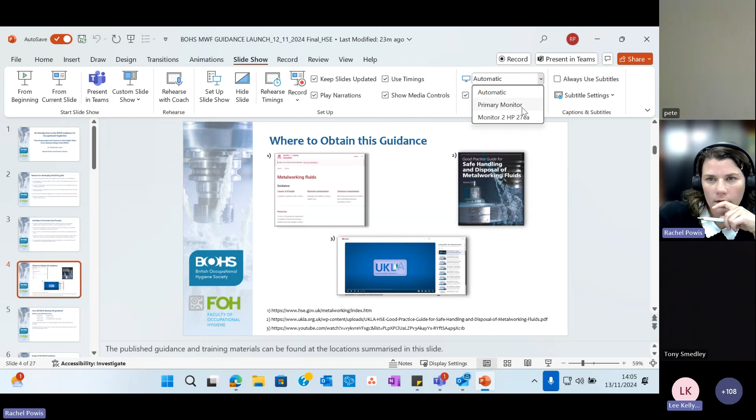Rachel, I'm so sorry. I think we're seeing the wrong screen. I think we're seeing your desktop. Oh, right. Okay. It might be another window to click on. Bear with me. Oh, there we go. Full screen. Is that working? Oh, you know what? It still goes to the other one. How very strange. Can it be dragged over or something? No, that's what I'm trying to do. Lee, help. So if you go to slideshow on the top bar, and then monitors on the right hand side, automatic, and then maybe select if you're using a multi-monitor setup there. And then try going from beginning. Is that looking any better? Yeah, okay, perfect. I'll skip back to the beginning. Sorry about that. This is a problem with having to come into the office because my Wi-Fi at home's not working. So there's been a few last minute changes to the schedule.

Right, so picking back up from where we were, a lot of the reasons for the health effects that we're seeing are due to contamination of predominantly water mixed metalworking fluids. So this could be metal contamination, chemical contamination, or biological hazards, all of which increase the risk to health. Exposure is predominantly through inhalation, through breathing in the mist, fumes and vapours from machining, and all of these increase the respiratory health risks.

One thing that has been identified is that many UK companies don't understand these health risks, and they're not doing enough to act to reduce the exposures to metalworking fluids.

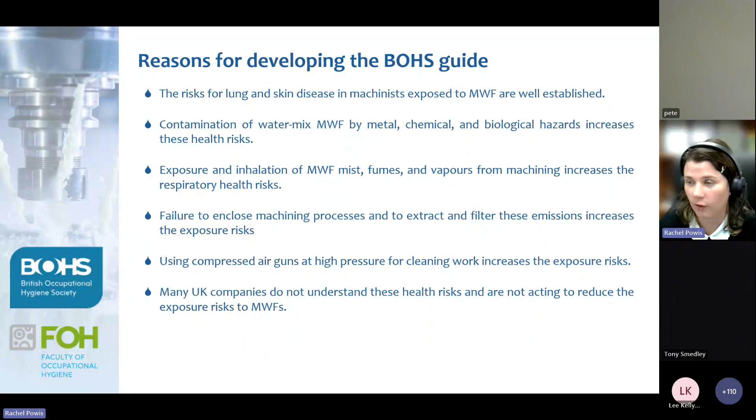As such, there's been a lot of activities recently to promote good practices around control and reducing these exposures to metalworking fluids within the workplace environment. So BOHS has already organised several regional meetings, and there's been conference sessions all aimed at occupational hygienists and focusing on these control measures to reduce their health risk.

Concurrently, HSE has worked with BOHS to develop good practice guides for occupational hygienists, but also information directly for duty holders for working safely with metalworking fluids. This is something that's been reflected by the UKLA stewardship group. In tandem with HSE, they've developed a good practice guide on managing the quality of metalworking fluids, and that was reviewed by BOHS members. There's also a lot of published guidance on YouTube, with training videos predominantly aimed at duty

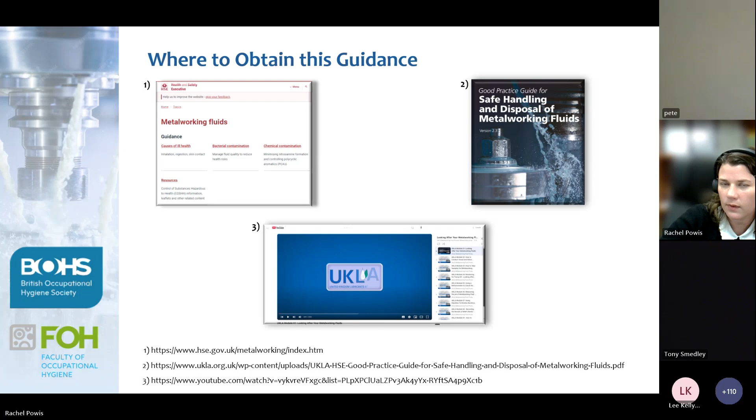holders. However, there was a gap for guidance for hygienists on how to assess these risks. All this other guidance is available online. I'll leave this slide up for a few seconds so you can get an idea of where you can find these. But as I say, there was an identified need for specific advice for occupational hygienists to visit machine workshops and undertake these surveys for exposure to metalworking fluid.

As Mary's already introduced, BOHS developed this guide through a metalworking fluid expert group. It's already been introduced to you, thank you. The panel included occupational hygienists and occupational health risk specialists. The guidance in its form now is available online, and it's been reviewed by HSE and both BOHS internal experts and external experts.

So the scope of the guidance is to focus on risk to health from metalworking fluid and how to manage that. The sections are on managing the quality of metalworking fluid, as well as assessing employee exposure to metalworking fluid and general good controls to reduce the exposure. One of the main takeaways from this guidance is an audit tool aimed at hygienists to be able to use in the field to assess the adequacy of controls. And we're going to talk about that a little bit later on towards the end of the presentation using a specific case study so you can see how it can be put into action.

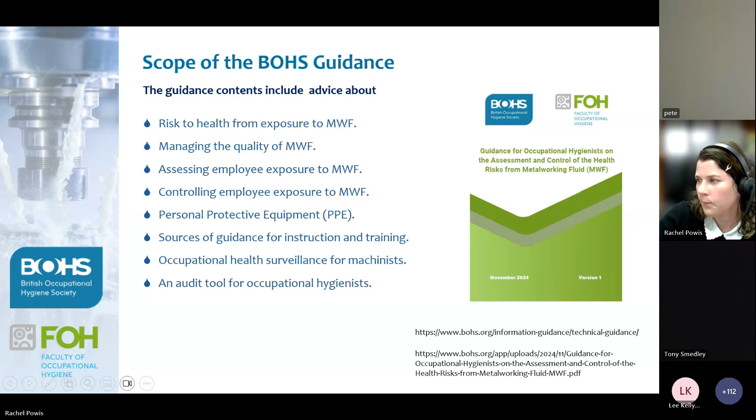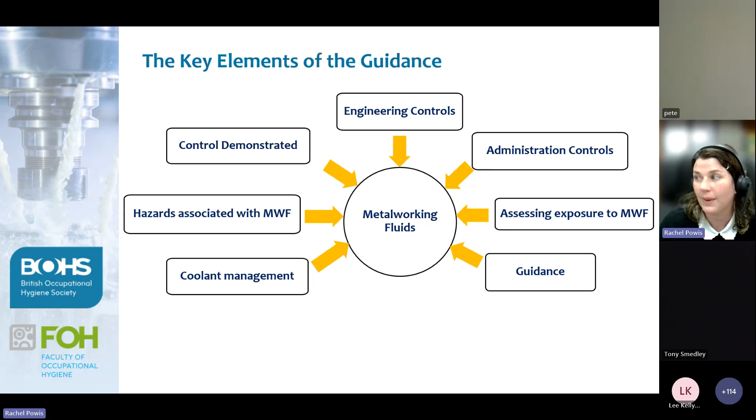So the key elements of the guide, just illustrated in this figure here, focus on the maintenance and use of control measures. However, to provide a little bit of context for people who are using this guidance and using the audit tool, I just need to talk about some other sections that summarise the hazards associated with metalworking fluid and some key principles for managing metalworking fluid quality.

So the main health risks from exposure to metalworking fluid are respiratory disease and skin disease. So these conditions are caused by contact and exposure, mainly due to inhalation. This can be from the metalworking fluid mist, fumes and vapours, respectively. The most serious respiratory diseases are allergic, and they include occupational asthma and occupational hypersensitivity pneumonitis.

This is especially evident in older water miscible metalworking fluids, where as fluids age, they can become contaminated with fungal or bacterial allergens or chemicals, and it's especially evident in poorly managed metalworking fluids. That's not to say that new and clean fluids are not a cause of respiratory disease. It's just that the risk greatly increases, particularly in older fluids which have become contaminated. No single hazard has been identified as a cause for these respiratory allergies, but it's likely that it's due to the bacterial and fungi or yeast growth in the fluids.

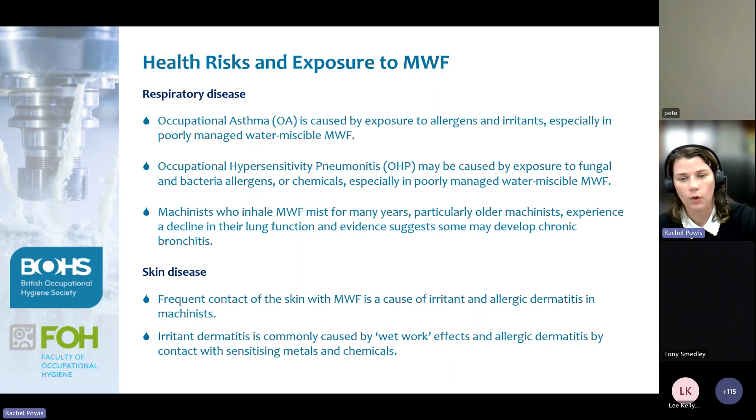As well as this, contact exposure can commonly cause skin disease. This can be irritant or allergic from contact with things in the fluid, but it could also be from wet work, especially where operatives are soaking their hands in fluid for quite a long time. Again, some individuals are susceptible to this because of the sensitizing metal and chemical elements within the fluids.

So this is all to say that exposure to the hazards in metalworking fluids is a complex circumstance. Hazards vary, and that means that we're looking at a changeable exposure circumstance. Tramp oils, metals, biocides and microorganisms can accumulate in the metalworking fluid, which greatly increases or changes the health risk as the process goes on.

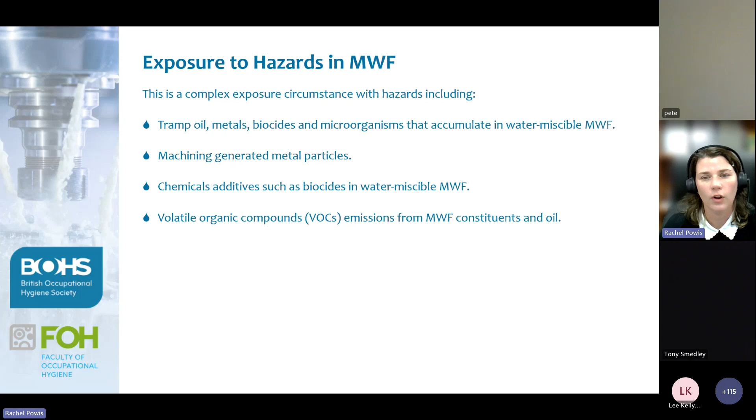There's also other considerations to take into account, and that's the way that fluids and droplets and aerosols are getting into the environment. So this can be from high-speed machining or cleaning down, which generates quite a lot of aerosol, but it can also be from volatiles or VOC emissions associated with the fluids and the oil.

So with this in mind, and given the exposure and health risk, it's essential that employees exposed to metalworking fluids are within an occupational health surveillance programme. So early detection of these is important. Typically, health surveillance is undertaken once a year, and it may include lung function measurements or dermal checks for people

with relevant symptoms. This guide is not to go over occupational health surveillance, but it does point to general areas and guidance and the sort of health surveillance that's important and should be in place. So if you need any additional guidance to this, I'd signpost you to the COSHH Essentials, which focuses on occupational asthma and health surveillance for occupational dermatitis.

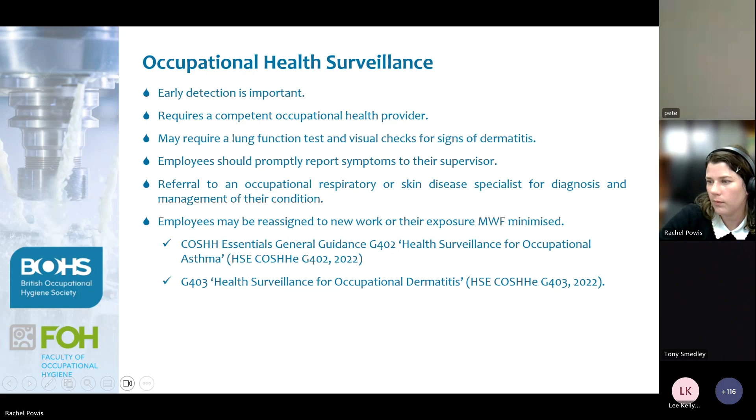What the guidance is aiming to do, however, is provide a framework for managing health risk and exposure. To give a bit of context on how this is discussed within the guidance, I'm just going to walk you through some control measures, just following the hierarchy of control.

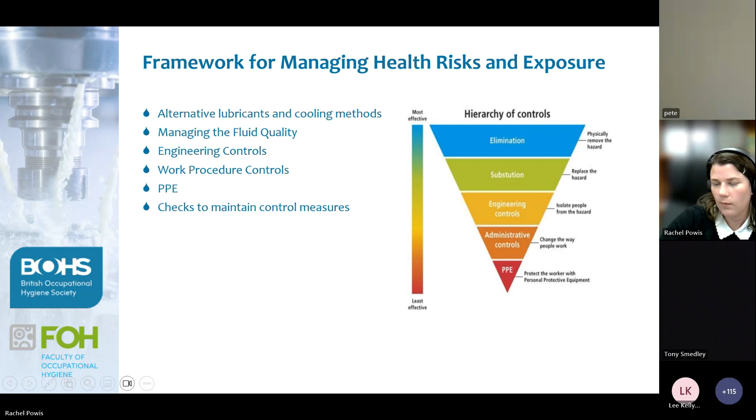So first off, there's been a lot of developments in the lubrication and cooling methods, which means that there are other options rather than normal fluids that are making their way into workshops and into the environment now. So one of the options for reducing exposure is to replace normal water-based metalworking fluids with an alternative.

So within the last decade, there's been quite a lot of advancements in this, and this has been predominantly pushed through really for environmental sustainability reasons. But some of these new technologies could have the addition of being able to improve employee safety.

So, for example, semi-synthetic and synthetic metalworking fluids, in which the mineral oil content's been rapidly reduced, could be a safer option because there is some evidence to suggest that bacteria can't readily grow in these environments. Additionally, plant-based oils are becoming quite popular, and they could offer some potential benefits from a workplace exposure point of view, mainly due to the fact that these aren't volatilized quite so easily. So potentially there's less VOC emissions.

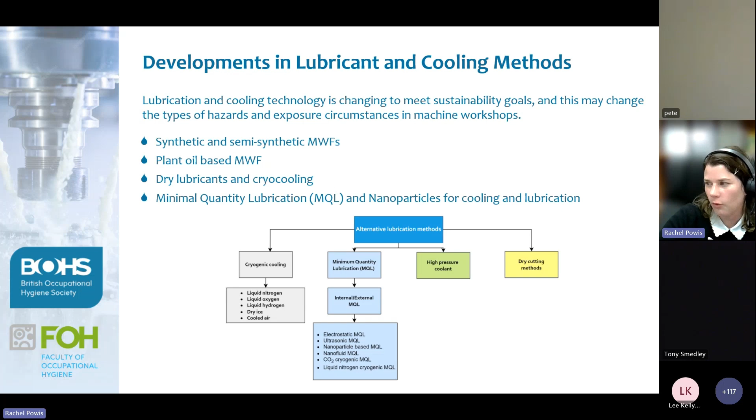So moving on from here, with that little bit of background, we're now going to take a look more in depth with the guidance and what it is focusing on. So the main takeaway from the guidance is the BOHS audit tool and how controls are being applied effectively to reduce employee exposure. So with that in mind, I just want to give a quick rundown of control options that are available. So the guidance outlines practical control options, again, consistent with the hierarchy of control.

It's not intended as an LEV design guide. Information from that kind of perspective is already widely available. So there's information from both the HSE and ACGIH, amongst others, focusing on effective LEV design. The guidance does, however, talk about how these can be applied for control, and as an occupational hygienist, how we need to be aware of exposure scenarios that they're aiming to control or risks within the workplace.

So due to the nature of machining and the wide range of machine types, everything that we've come across within a normal workshop, it's unlikely that engineering controls are going to be a one size fits all. That being said, it's generally practicable and affordable to fit LEV on most CNCs, particularly where they're already enclosed. The guidance does talk about specific considerations for open plan or large gantry machines, but in the main, extraction is essentially going to be the best option for minimising exposure whilst minimising impacts on production rates.

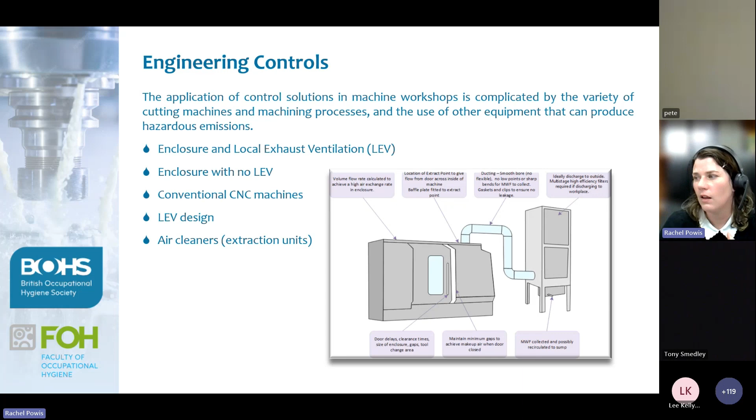In tandem, work practices and procedures to reduce both inhalation and skin exposure to metalworking fluids can be effectively applied alongside these engineering controls. So a common consideration is with the use of compressed air, which is often used to clean components or tooling heads and is generally preferred because of the quality of finish that it can give. However, the use of compressed air line does generate large amounts of metalworking fluid mist and droplets within the air.

So in addition to the inhalation risk that this can obviously cause, it can contaminate clothing and the skin, and the force of compressed air can also drive contaminants into the skin, which exacerbates any skin disease risks from this. So there's several practical and commercially available alternatives to compressed air lines, and they're outlined within the guidance and just on this table on the screen.

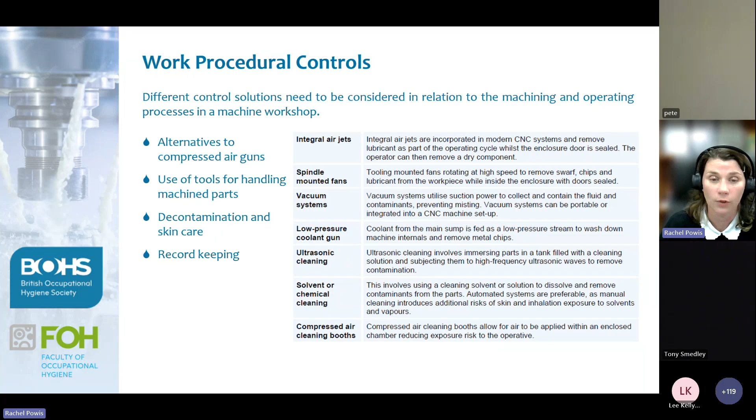So the guidance pinpoints to these and discusses risk mitigation measures, as well as discussing overall control strategy and the need to consider decontamination, skincare and suitable maintenance and management records for an overall control of metalworking fluids.

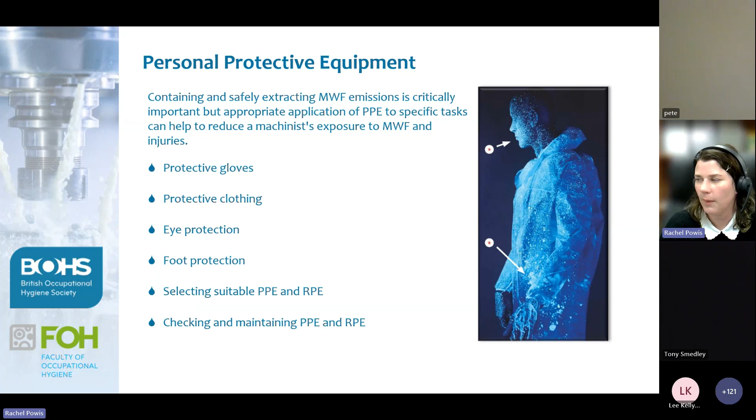So with that in mind, it might be a requirement for certain tasks, and it's a consideration when you're handling neat metalworking fluids, but also chemical additives. It can be a consideration for draining and cleaning machine sumps. Again, the guidance is not meant to be an exhaustive list of PPE, but it does signpost to information to make clear and suitable PPE selections.

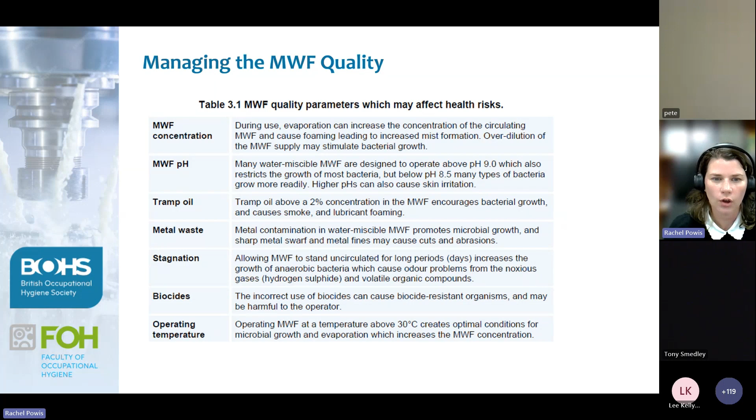So, as we've already discussed, managing metalworking fluid quality is important for maintaining the fluid, but also mitigating health risks. Changes in the composition of metalworking fluids can give rise to bacterial growth, but it can also affect the fluid misting. Without going into this in too much detail, what you can see on the screen is typical parameters that need to be considered in a good policy to maintain and manage metalworking fluid quality. The guidance signposts over to existing work that's been done by the UKLA, and you'll find a lot more information on this within their guidance.

So now to the nitty gritty, and I imagine this is the bit that most people are here for, and that's exposure limits and control guidance values. Because of the vastly complex and evolving exposure scenarios that we're looking at with metalworking fluids, it does pose a challenge for occupational hygienists when we're assessing the risk to health and the suitability of controls.

The problem's twofold. Firstly, the complexity of the risk factors makes it very difficult to derive a health-based exposure limit. Previous HSE guidance values have been withdrawn when evidence emerged that they were no longer protective of health. These have not been replaced. So currently the only remaining regulatory benchmark, in the UK at least, is the requirement to reduce exposure to ALARP.

There are alternative OELs that do exist internationally. And although the adoption of these can be quite useful as in-house standards in order to be able to compare results from exposure monitoring, where the aim is health risk reduction, they may not be sufficient, as there's further evidence to suggest that ill health can occur at levels much lower than these, which were much lower than the previous UK HSE guidance values.

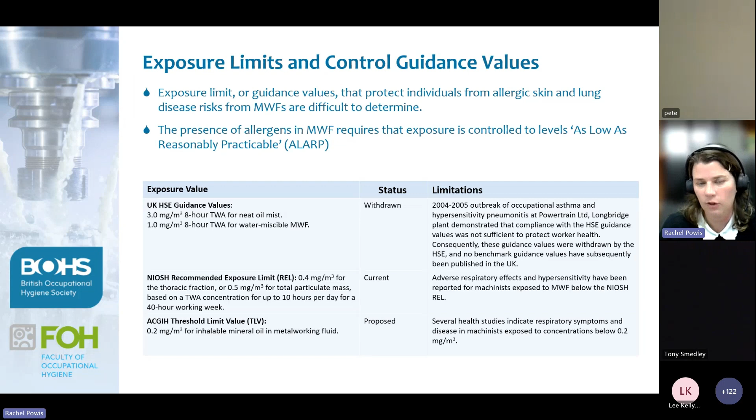In addition, the second part of the problem is that developing a reliable measurement of exposure to metalworking fluids is technically difficult. The HSE MDHS 95/3 was at its introduction seen as a thought leader in the approach of generating reliable metalworking fluid measurements. However, changes in the makeup of fluid composition, particularly the removal of boron salts because of their own health concerns, is leading to limited application of this method.

Other sampling methods exist, but they all have their own limitations as well, which can range from evaporative losses or underreporting of VOC components to over-reporting by not being selective and essentially just being a gravimetric method, taking into account any particulates within the workplace as well.

Ooh, sorry, I skipped on a little bit too quickly there.

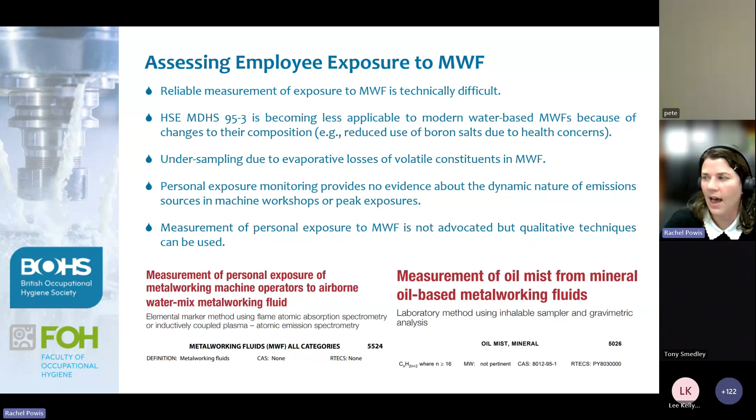So traditional sampling methods may have their place, but they don't offer an awful lot of information on the dynamic nature of emissions within the workshop. They also focus very narrowly on the metalworking fluid component and none of the other health risks that we've talked about. Therefore, the guide is now advocating for qualitative techniques, and most of these are probably things that are already familiar to you as occupational hygienists.

So methods that can be used for risk assessment and to assess the performance and suitability of control measures are things like a dust lamp or a Tyndall beam, smoke testing, and direct reading aerosol monitors. These are all useful tools, especially the Tyndall beam in visualising mist. The correct use of this method is already described in MDHS 82/2, and it can be useful when assessing routes of exposure or identifying any leaks within enclosures or any areas where operatives may be coming into contact with

an emission source. Smoke testing is very useful as part of LEV reviews, checking for leaks and ensuring performance of LEV, and also checking that enclosures are maintaining negative pressure. And lastly, DRAMs are a useful tool, providing the user is aware of their limitations. For example, the accuracy of DRAMs can be greatly reduced in environments with high humidity, but also environments with high background particulate levels, which is something that you may come across in open plan workshops.

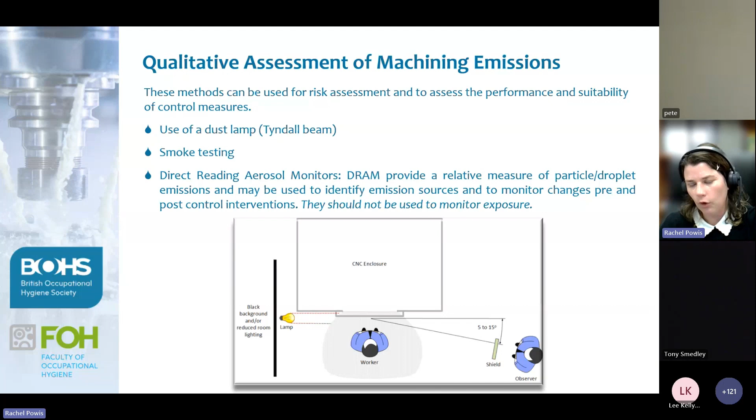Also, the way that they're calibrated is generally against solid particulates rather than aerosols, which is obviously what we're interested in when we're assessing metalworking fluids. So this means that we're looking at DRAMs as a qualitative tool rather than generating quantitative numbers to compare to any occupational exposure limits. So DRAMs are very useful though in determining relative changes in background aerosol concentrations, and we'll talk a little bit more about how to apply that when we get to the case study.

So the guidance is therefore intended to take the approach of focusing on control of health risks and assessment to ensure that metalworking fluids are being appropriately managed. Before using the guidance, some key questions to ask your client are: do they understand the health risks and do they understand what controls they have in place? And what are they doing to manage these risks?

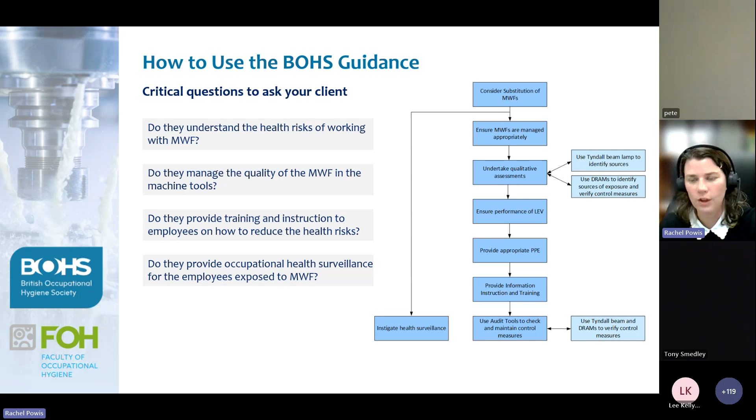So control of exposure to metalworking fluids requires the management of a wide range of controls, and it's not possible to verify the effective management of these using only exposure monitoring. So the tool therefore aims to provide a framework for assessing the risk to exposure through inhalation and through skin contact, and to give you information to be able to inform a suitable and sufficient risk assessment.

So it considers the routes of exposure, it considers the exposure sources, and it considers process risk factors such as machining speeds, machine run times, frequency of interaction, as well as additional controls which are aimed for the fluid management and enclosures, LEV, and effective checks.

So in this case study, I'm just going to walk through how the guidance was applied to a busy medium enterprise CNC shop. And the area had multiple conventional CNCs with varying degrees of control. Some were automated, the majority were enclosed, and the majority were fitted with LEV extraction. These were the recirculating type, but the LEV systems were fitted with filter monitoring to alert of any issues or anything breaking through back into the workplace.

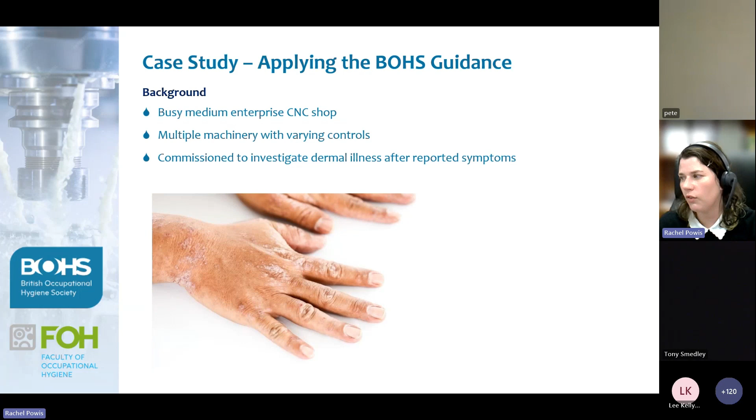So it's worth mentioning that there are considerable variables that can affect the results from the DRAMs. This can include open doorways letting in vehicle emissions, aerosol and particulate from neighbouring processes, which, as we said, is a consideration within our open plan workshops, and also general changes through the day, which may not all be increases of aerosol levels from metalworking fluid mist. So regular checks of background and baselines were undertaken to ensure that there was some comparability within the results.

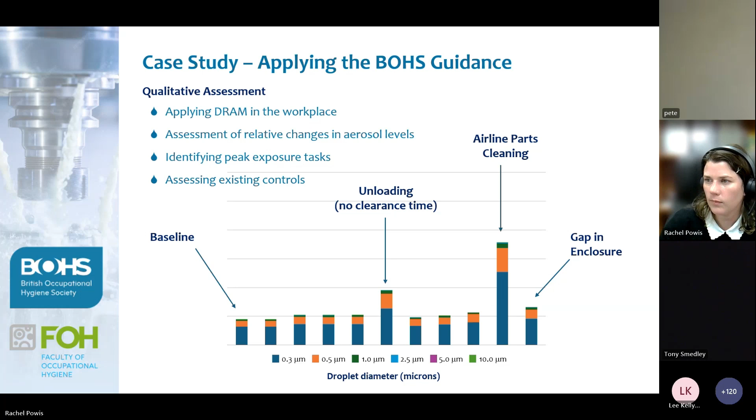Applying the checklist from the audit tool, there were several positive applications of controls and good practice, such as the machine LEV provisions, LEV monitoring on the recirculating systems, and training relating to inhalation exposure and health effects.

However, there were some process risks and production factors which resulted in high risk practices, such as using compressed airline at high pressures outside an enclosure without an additional source of extraction or mist control. Furthermore, there was poor understanding of health risks for skin exposure, which was leading to uncontrolled dermal contact.

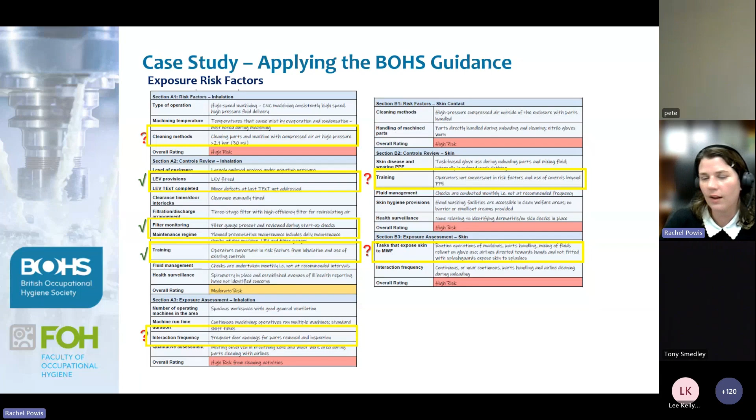Additionally, there were issues with the fluid management. So moving on to the second part of the audit tool, again, you can see there were some good practices in place regarding regular checks on concentration and pH and carrying out dip slides.

However, out of scope dip slide results were not being actioned, which had led to bacterial contamination becoming prolific. Part of the reason for this was that checks were being undertaken as an administrative task and it hadn't been involving operatives in undertaking these.

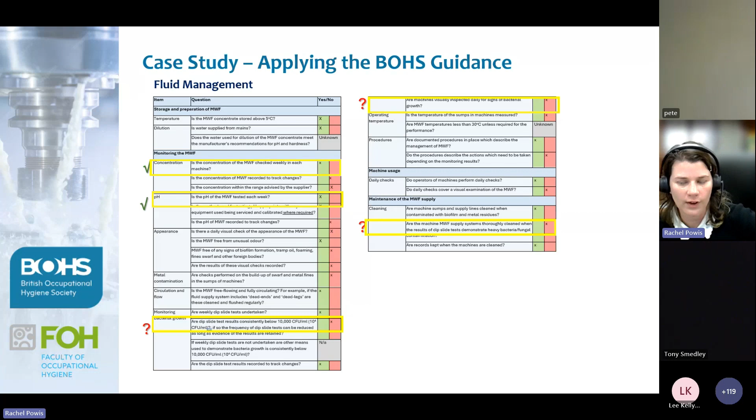So using the audit tool allowed for identifying gaps within the existing control structure and allowed for actionable steps to be put into place to improve both the fluid management and controls specific to the identified high sources of exposure.

So awesome, thank you very much. Thank you so much, Rachel. You're already getting applause buttons here, I'm going to give you one too. Yeah, it was a very, very good summary. I'm so looking forward to reading the whole document later. It was excellent. We do have a couple of questions in the chat box, but I'm going to be selfish once again and ask my question first, and I'll get to your guys's. So yeah, fire away. Oh, awesome! Yeah, we have plenty of time, so we can really ram you with questions now.

So one is a burning question I have, I think it's on a lot of consultants' mind. If consultants as myself are listening right now, you'll probably be fielding the same sort of phone calls that I know I've been getting. So the client calls you up and they really want you to come to site and do sampling, right? Come sample my mist, right? And then it begins this back and forth, and they send you safety data sheets and all this. And of course, there's no boron, so 95 is out the window. And on occasion, it's viscous enough for 84. That might work. You might even not have to, but maybe consider IR spec or GCMS. It depends on what exactly the oil is. So you're kind of fishing around.